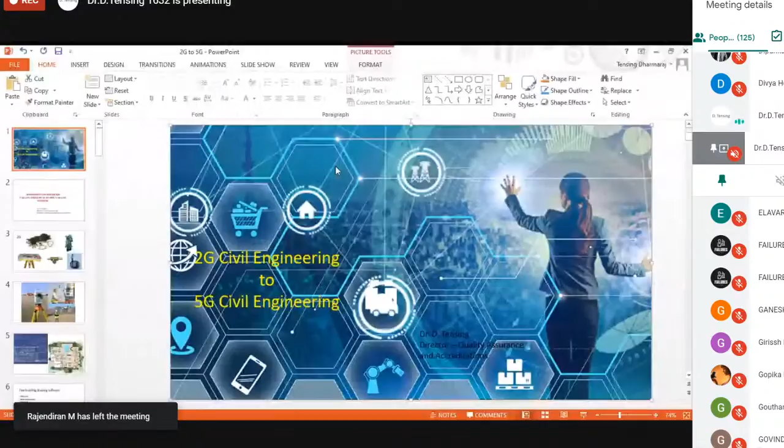One of my favorite and wonderful students is Dr. Rosie, a very good student. When we go into a classroom, we are attracted by a good number of students, and distracted by a small number. That's real life - attraction and distraction both happen in a civil engineering class for any teacher. I had the same experience. In any class, there are very few in the top list, a considerable number in the middle level, and a few at a different level. When I was teaching Dr. Rosie, then known as Rosinate Teresa, it was very interesting. With that same relationship, I think I'm here telling you something different now.

I was a conventional teacher - chalk and talk, no talk and walk. That was my way of teaching once, chalk and talk. I used to use a scale to draw diagrams on the board with different colors of chalk, so that people could learn. That's how I used to teach.

Now I understood that I need to transform - I need to get transformed into the next level of civil engineering teacher. Then the topic came to mind: we were single G or 2G people, how are we going to cater to 4G? Though sometime back it was 4G, now it's 4G plus 5G plus 6G, and it goes on. How are we going to deal with them? I can't deal with a single G way of life when 6G or 7G or whatever comes in the future. So first I need to get transformed - as a teacher, I need to become a 5G or 6G teacher, adapting to 5G or 6G people.

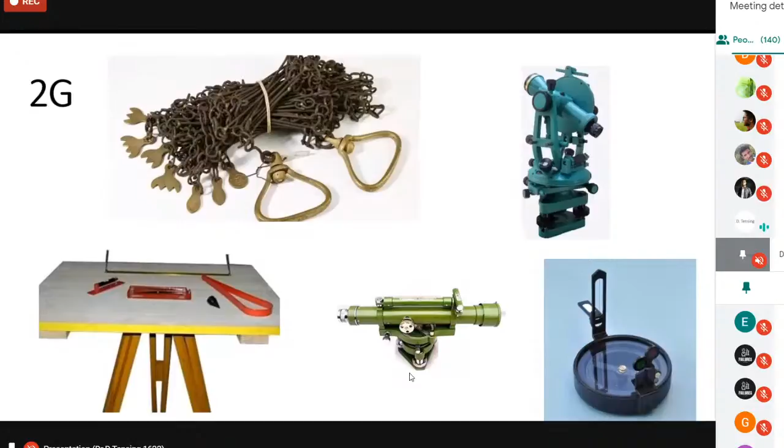Now, what is really required? Only this. That is what we need to understand - what is very much required for us. There's no need for knowing the old methods now. I think teachers should not get angry, civil engineering faculty should not get angry with me. In my experience, along with my alumni in India as well as abroad overseas, I found that this old approach is not required. The students need not learn this. We may say fundamental learning is required, but there's no need - if they know this much, that is fine for them.

This is one critical change that has to be done. I have seen some students who are close with us while teaching total stations in class. One or two students showed much interest and helped the faculty closely. After some time, we found at least one or two of them purchased a total station and started a small surveying company. They are now earning money and are very busy, but they know only total station. They said there is no need to know anything else, sir, total station is fine.

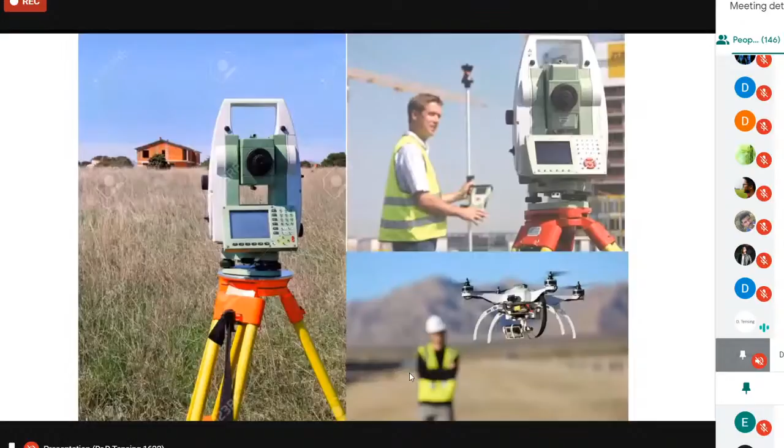So here, what is expected in the field? The next day when you leave your BTech or BE degree, can you take up a project? Probably everybody talks about it, but I'm being a little more serious here. So are we ready to take up a project the next day and actually do it? If students still have hesitation, there is something wrong with our education or your learning. People are willing to teach, but how willing you are to listen and take it seriously is a big problem. This is what you need to understand.

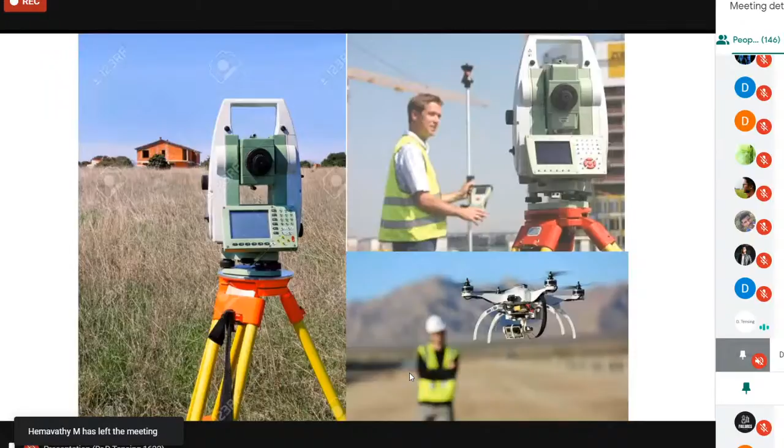Again, aerial surveying using drones. Now people are seriously doing it. Some colleges are even doing consultancy using aerial surveying with drones. I don't know exactly what is happening there, I haven't discussed it with Dr. Rosie, but probably you can think over it.

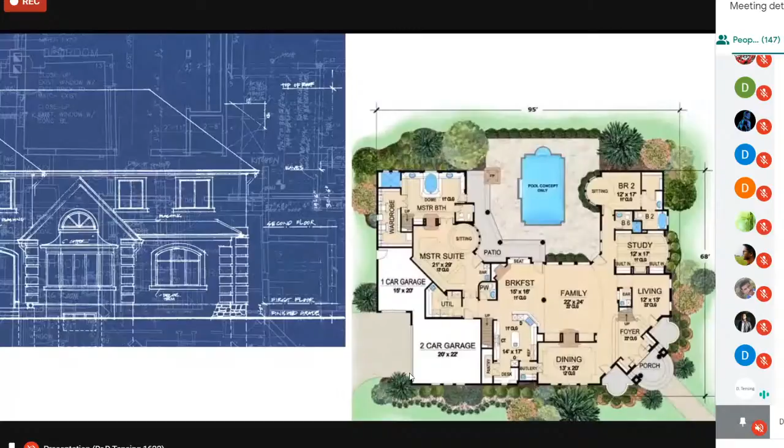When civil engineers finish the course and go out, they immediately ask: in which way are you outstanding? Can you say in which way you are outstanding? If we are outstanding, we get into something, but they really test us. It is not easy, they test us and find out if we are good or not. If we are not good enough, then we have to stand outside only. We have to become an outstanding graduate, an outside-standing graduate, right?

Now one of the important things I want to talk about here is the application of robotics in civil engineering. This is the need, and what I want to stress is the knowledge of civil engineers in robotics and automation. Civil engineers have to learn the subject of robotics and automation. How you learn it, you know better, because there are so many online portals, NPTEL is there, so you can definitely join and become good in robotics.

When you learn robotics and automation for civil engineering, the companies making civil engineering products very much require you. They can well utilize a robotics engineer, but companies prefer a robotics engineer from a civil engineering background. That is challenging, and I want you to understand why, because they want people who know both civil engineering and robotics. Otherwise, in an interaction or discussion, the robotics person will simply dictate to them, and that is what I want to avoid.

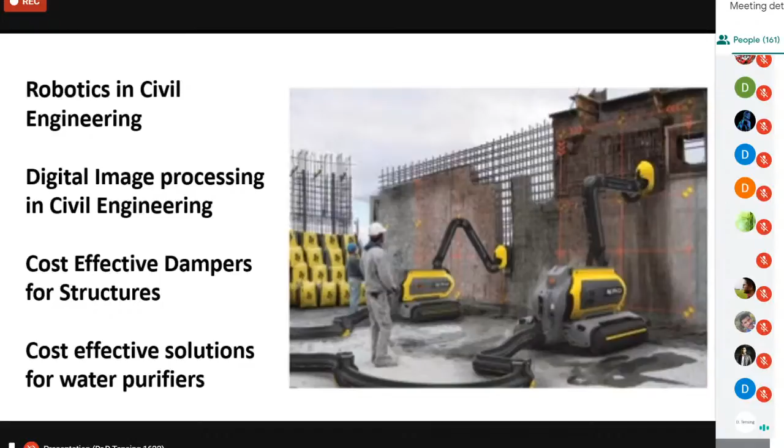I am currently involved in this research, using image processing in civil engineering. One student is doing a PhD on it, and we have done 2 projects in MTech using scanning technology, laser scanning technology. That's what we are working on here.

Then there are dampers, because the problems in the world now are unexpected and unwarranted. Here you can see dampers for structures, for seismic resistance and accident-proofing. So dampers are required.

In dampers there are some problems with getting the fluid, since damping fluid is very costly. So we have done research here in the campus, and got a DST project worth 2.57 crores to study dampers and their applications. We have made a smart rheological damper at a very low cost, probably around 10,000 rupees. We are yet to release it, but the patent has already been filed, so we will be commercializing it shortly.

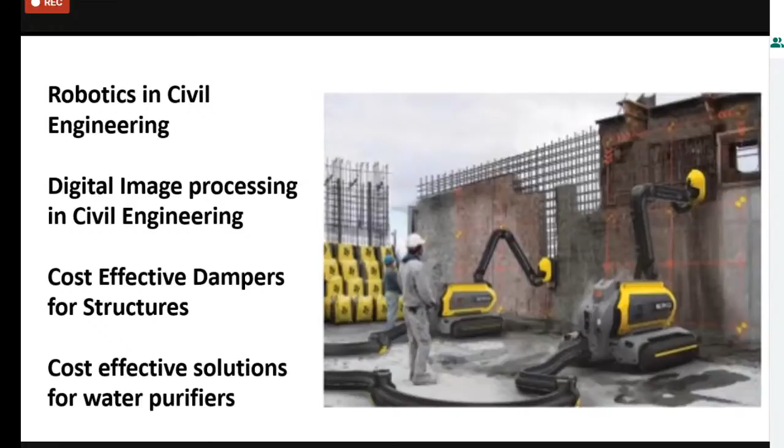Then the next requirement is cost-effective solutions for water purifiers. This is still not effectively addressed. We've thought about it for a long time, but we still depend on Kent and Aqua for water purification. But cost-effective solutions exist using natural plants, and this is research many environmental engineers are involved in. We are working on that too.

I want all the 4th years to think over this, because this is expected. There's real competition prevailing outside in any company. But if you can say with confidence that you can do it, then automatically you become a very effective engineer required by the industry. So, SkyCatch.

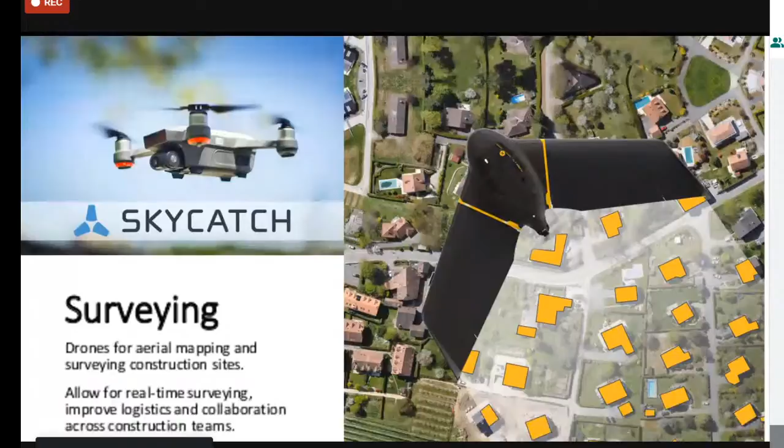I want you to understand how the technology is used here, what is the concept of it, how they made it, and what is the background. We must be thorough. We cannot simply say 'I know this equipment, I can use it' - it's not like using a fridge, made by somebody else that I can just use. It's not like that. From zero, understanding how this works, what the system is, how it does it - civil engineers are required to have this from basic to deeper knowledge.

Now, interdisciplinary learning - much is already talked about by experts, but I'm stressing it here because it's what is required. When I talked to one alumnus overseas, one of the biggest company owners in UAE, based in Ajman, Sharjah, he told me that when he calls for interviews, civil engineers come and say they are good in that. But someone who comes and tells him 'I am good in automation' or 'I am good in this and that' stands out.

Apart from civil engineering, I am good in this, I just give a test, a small test of 5 to 10 minutes, and immediately I employ him. So again, I have not employed him because he's an intelligent student or a very good student, but because of his extra ability, extra knowledge. Because in profession, everywhere when we get contracts, we want to take new challenges. They won't take conventional building alone. We want to take any project, whatever government announces, mechanical engineering problem, I compete. So that's what he said.

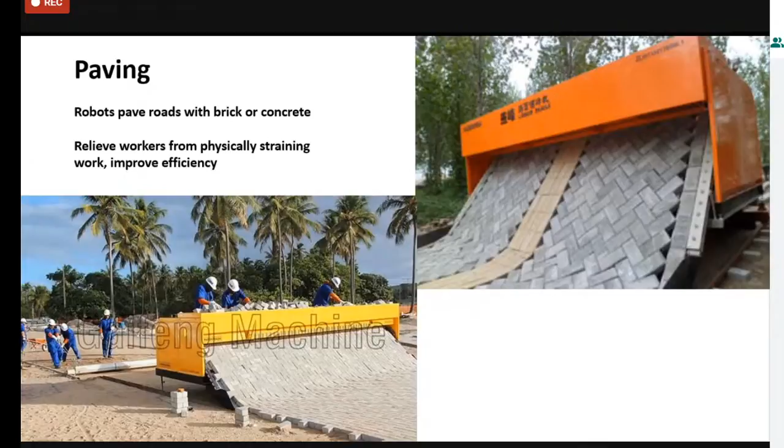So when you go for interview, they are expecting engineers like this, people ready with any knowledge. It is better to have, instead of a civil engineer alone, an engineer who knows other concepts also. That's why I'm talking this to all civil engineers. Now, concrete finishing, probably you would have seen how concrete work needs no man.

Again, very recently we had a meeting with the alumni, and in that meeting also they were telling about this. Man, after some time, cannot work together the way we proceed. So instead of having 10 people, we need only 2 people to operate this, 1 or 2 people to see that it is done. So without the use of man, things are going to happen. So joining together or living together is also a problem now.

I hope you understand that. So that is how the life is going to change, how the world is going to change. It will really be a problem to live near each other because of fear of death. Again, this is not the one disease which has come, it is going to be followed by so many. But it's going to be a challenge because all our food habits changed, all our lifestyle changed, so accordingly the resisting power will go down, and definitely we need to go for automation.

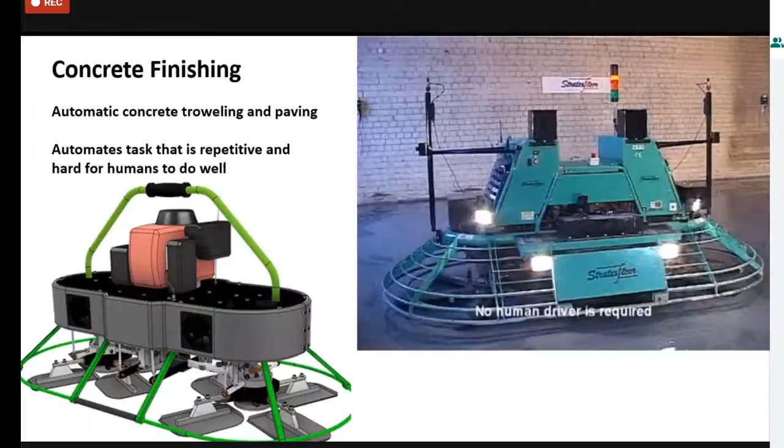And what will happen to employment? That is going to be the order of the day. People have to find their way of living, a different way. It's not the conventional way. Conventional way is going to be gone totally in a matter of a few years. So you have to move from tradition to the next generation, the next lifestyle. It is inevitable.

Apart from that, what is precast concrete? Precast blocks, even bathrooms and bedrooms, are made in a factory and carried and placed in position. I have seen this in Abu Dhabi, probably in India also it is happening, for multi-story G+2 buildings, done with the help of a crane. In a matter of 3 days the house is ready, or in a matter of 3 months a big hall or a mall is ready. So it is done with the help of this automated system.

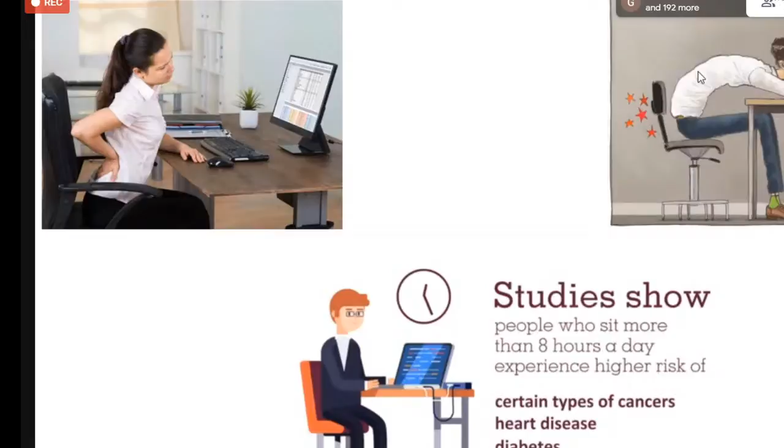Now we must know how to live, how to avoid this problem to the maximum possible way.

Okay, now I move to digital image processing in civil engineering. Application of digital image processing in civil engineering. Here you must understand autonomous scanning platforms. This is the area which we are working on now. Autonomous, it's a scanning platform.

So up to 1995, we had a good number of bugs. I think even up to 2010, a good number of bugs were worked out in this autonomous automatic platform with the help of robots. But now much research is being done, and companies are doing research in making it better. So you can see here, to perform navigation, 3D acquisition and 3D data processing without any initial knowledge of the scene and without human interaction.

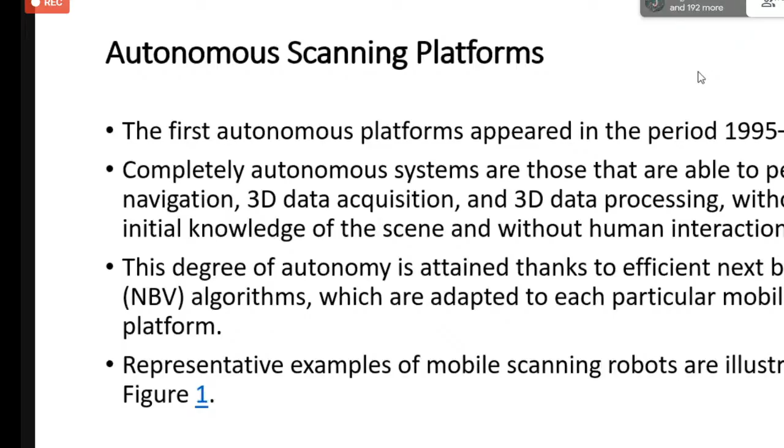So here, you can see some pictures of the devices - a camera, a scanner, and an embedded PC. This is the old type I am showing here, a rack and a mobile platform, a moving platform. It's not a mobile phone, it's a moving platform. So this moves around the building, scans the building, takes the data, then integrates and transfers the data to the PC.

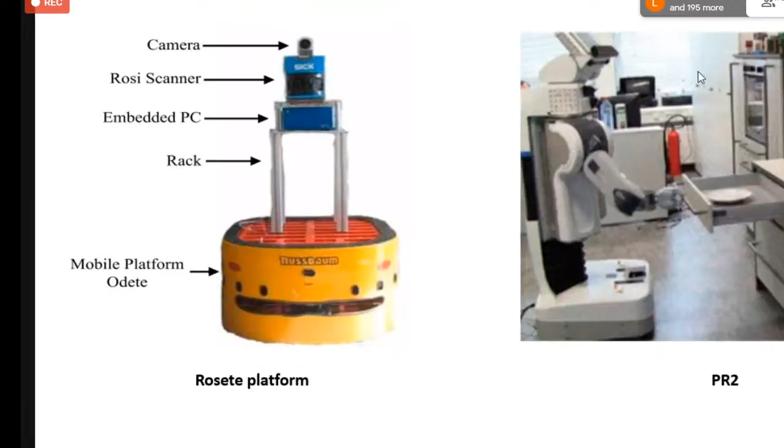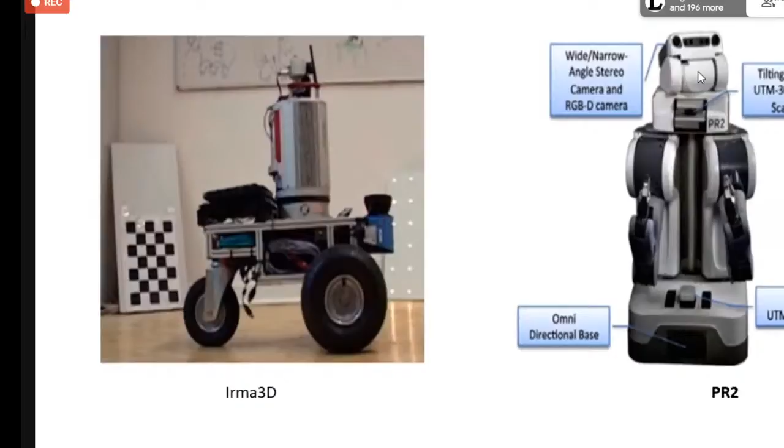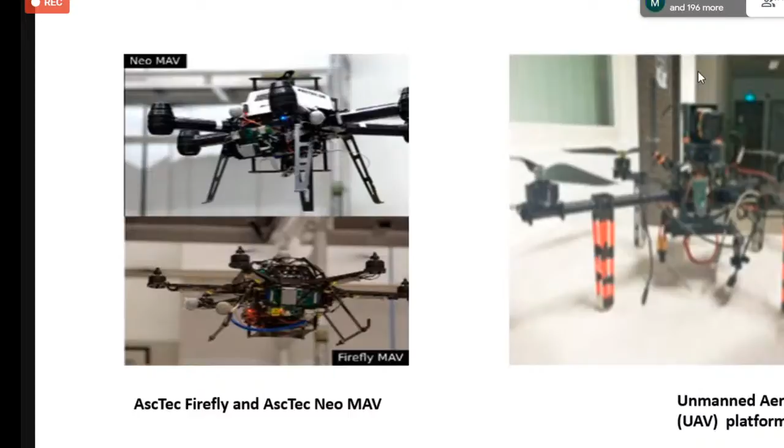So here again, another device you can see, it is called PR2. Then IRMA 3D - again, this is another improved version, which is also a moving robot. Similarly, you can see PR2. And then this is what I hope you are all familiar with, the drone, unmanned aerial vehicle, UAV platform. Again, this is also effectively being used now.

And then this is what I'm going to talk about, where we are doing our research now. We started our research here: development of an acquisition and processing system for building quantity estimation using digital image processing. So this is the area we are working in. Actually, we have done 2 projects so far.

What we have done - where the idea came from - again, it is from one of the alumni who is constructing all over the world. He is having construction in Russia, one of our alumni, that is a 5th batch student. He is having construction in Russia, construction in Nigeria with a huge hospital. He is doing a big hospital in Nigeria, and he is constructing a building in Mumbai. And then he came to me one day here, because they came for the 20th year get-together.

They came for the 20th year get-together. At that time, he just casually met me and talked to me about the technology. Sir, he is having 100 projects at a time, 100 civil engineering projects at a time. And I went to his office also in Ajman, Sharjah, and he has shown me all these things. And he was telling me one thing: sir, I will fund a particular project if your students and faculty are involved and interested in doing it.

He told us, standing before a building, you have to scan it. Once you scan the building, automatically I must know in my mobile whether the work has happened according to the project management schedule, whether the concreting, plastering, or whitewashing work has happened, and how much quantity of work is done. A deficiency report has to be automatically generated. So it has to be worked with BIM, building information modeling. It has to be done like this, sir.

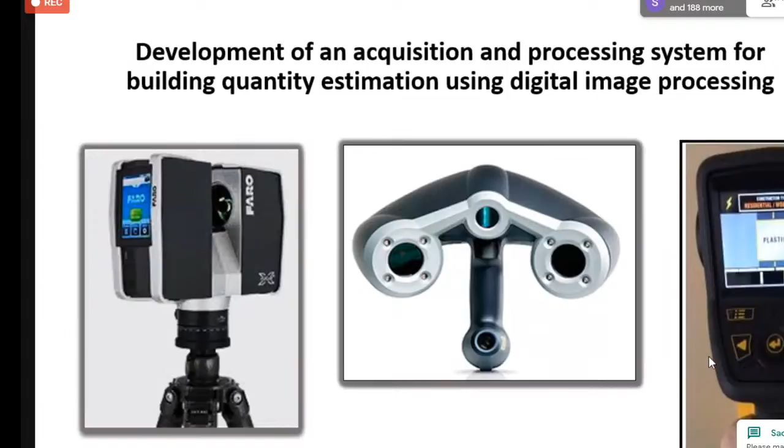So what we are now doing is using a marker. When you scan, it will identify, based on the color, what is the mix of mortar, M50, whether it's 1:5 or 1:6. A lot of improvements still need to be done, but we are doing the beginning projects at a starting level. Again, you can see their products and videos for level of reference.

You can see that, and you will understand what is required for the future civil engineer with the knowledge of digital image processing.

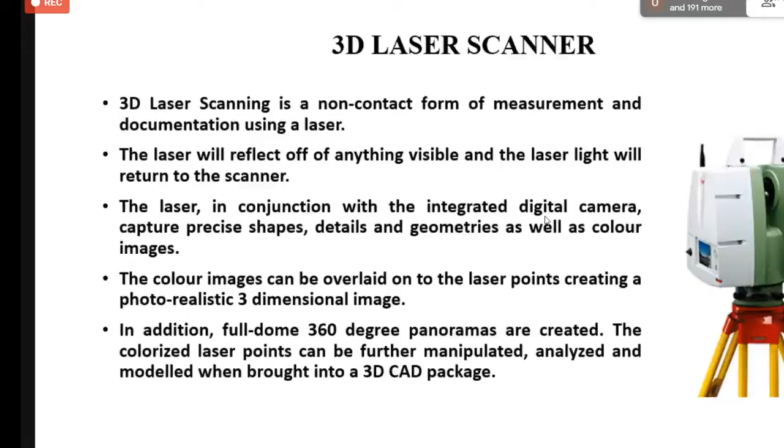We have also done a project. One of my PhD students did a project on image processing: an image recognition vehicle traffic signal device we wanted to make, which will control the timing of the green light based on the volume of traffic. So the system will automatically measure the volume of traffic and decide accordingly. There are some difficulties in it, but we have done the first one.

We are successful. So now the camera is also fixed along with the signals where the police are controlling. Then automatically, suppose if there is no vehicle in one area, it will detect whether vehicles are there, again based on the volume.

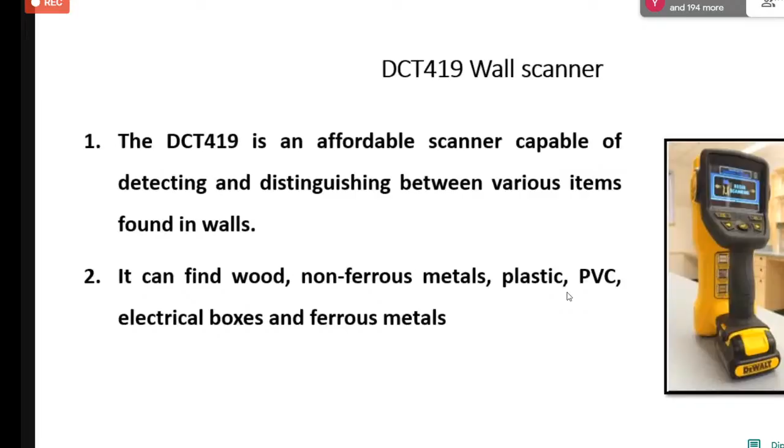Recognition of vehicle, volume of vehicle, orientation of vehicle—all these things are done by civil engineers. So you should not say we have to depend on somebody else. This is being done. Probably you also have some similar problems, but this is the way of life.

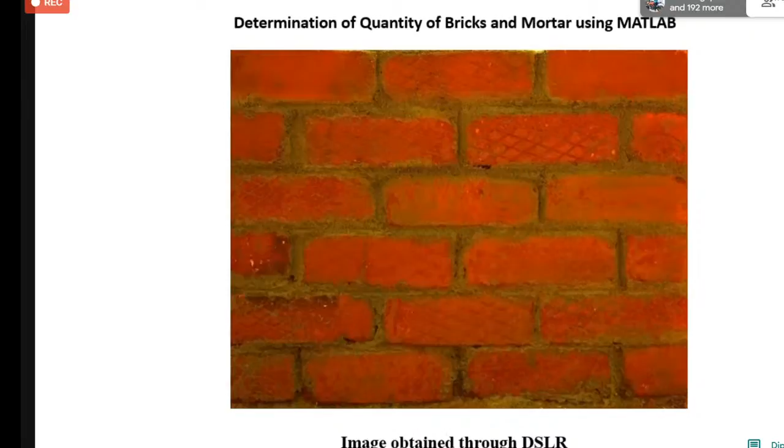If you are only an ordinary building contractor, now you can see mechanical engineers will do the job. One mechanical engineering student from our college is doing a wonderful civil engineering job in Malaysia. He's doing it nicely, right?

So this is about FARO equipment. Now this is what we see here, close FARO Focus 3D terrestrial laser scanner. Earlier they were using only laser technology, now they have fixed a camera also. The latest version has a camera which will take snaps, which is very much required for us, so that we can integrate color recognition and interpretation of data.

Then technology-driven construction with less manpower. Manpower is going to be the biggest challenge, so we definitely need to go for technology-driven construction. It's not only listening, it is implementing. It's no more listening—we know all, we listen to all, and then forget all. That is not the way of life. We need to do a little bit first, and when you do a little bit first, it will become a big thing later.

Start by attempting a little bit instead of doing a conventional design project. Normally I don't recommend the same conventional building design now—you must be a good designer, but there's no much need, software is doing it. Even if you do it, people only check whether you know it or not, based on your subject knowledge in class. But if you do some project differently, people are interested in listening to you. Even the interview board is interested, and people want to know what you have additionally.

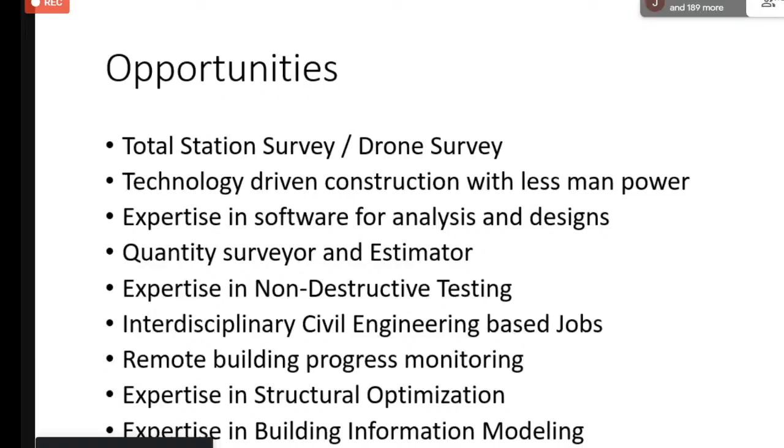Okay, so the next one is expertise in building information modeling. Everywhere now they are asking about BIM - do you know BIM, or what are the applications of BIM? So this is what is being asked, and I wish that you also learn it.

Outside courses - what are the courses outside your course or outside subject knowledge required? I just mentioned robotics and automation, digital image processing, and multimedia technology. And if you go for environmental engineering, chemistry - even concrete also, but chemistry is required. Then the next one is mobile app developing. I think our people are very good, any engineer is good at making it, but this is what is required. So these are some of the courses which we have to go beyond your curriculum and learn.

So I think I would like to conclude here. Looking at the environment, looking at the situation prevailing, I always tell my students one thing: keep going. And then keep doing, try winning, and always go extra mile with a smile. This is very much required for us. Keep going, even if there is a failure, even if you go through some difficulties or situations which are very horrible, we need to keep moving.

And what you have been doing, keep doing, and then try winning. Even if you lose, don't stop trying to win. So try winning and take extra - learn the thing what you require to learn further. Okay, go extra mile with a smile. Thank you.